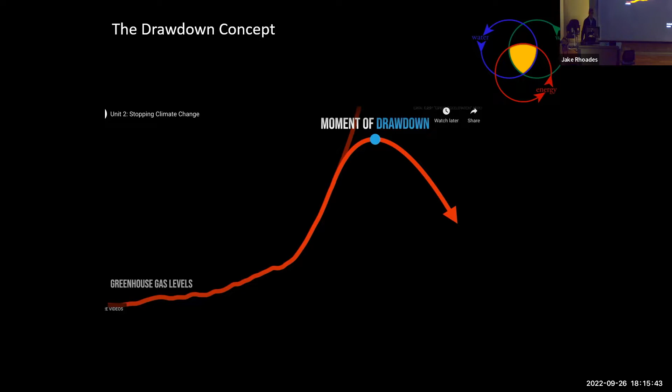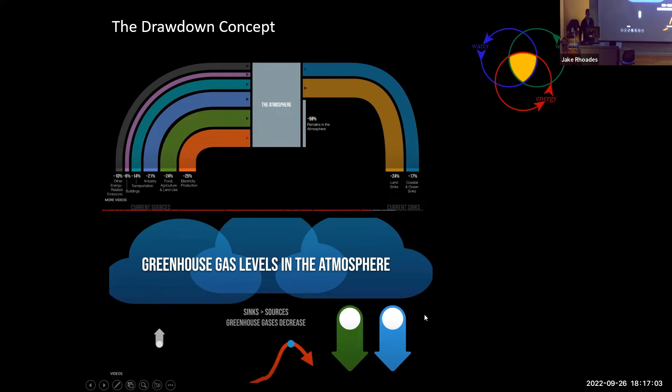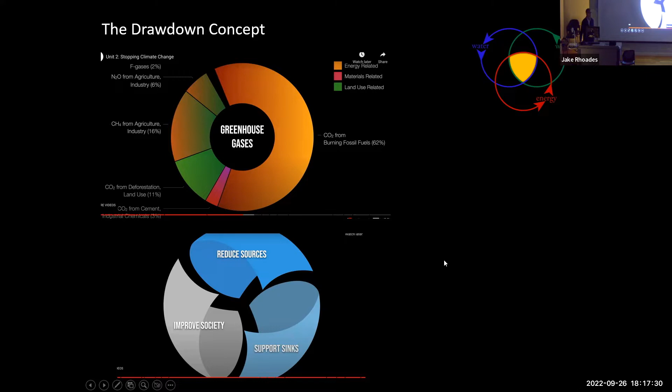And the consequences on extreme weather are going to be with us for 100 years. So we have to get to a model like this, where we have reduced all of these sources, improved the sinks—the ocean's capacity, forests, landscape, etc.—and in the process, improved the quality of our society. I think these can be done together. But this is the context within which we are designing our built environments.

And if you just look at the US, another way to simplify this is if you look at buildings and transportation—they represent about 60% of CO2 emissions, whereas industry and agriculture represent pretty much the rest.

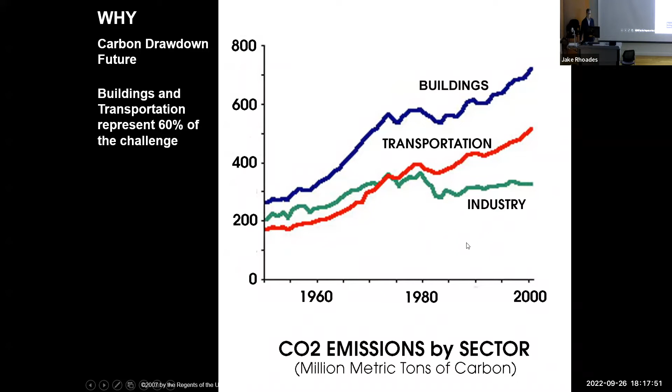So there are three important ideas I want to talk about, and I mentioned them at the beginning. One is to think of the buildings, your landscapes, transportation, energy, communication, water, waste, food, and the microclimate all as one design problem. You're not just doing buildings, you're not just doing landscapes, or designing transportation systems—these need to be thought of together. And if you do, there are all kinds of really interesting benefits across systems, a kind of synergy.

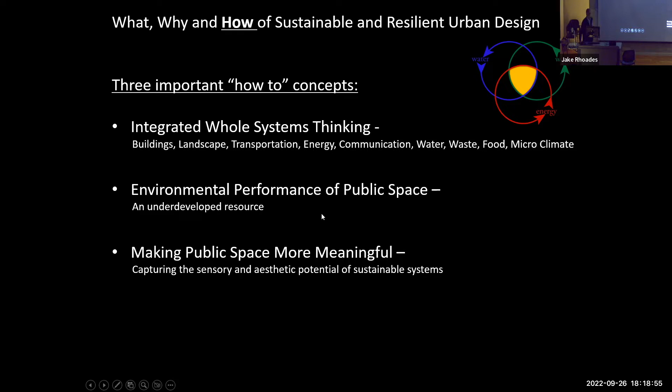The other thing is, as you'll see in a minute, the environmental performance of public space in cities is a huge amount of area, and it's underdeveloped in terms of its capacity to contribute to a more resilient and sustainable future. It also has the ability to make public space way more meaningful.

So why am I interested in environmental design at a community scale? Very simple, buildings are critical. I've worked on them for all my career in trying to make them better environmental performing buildings. And large utilities, they're critical, but they're too big and vulnerable.

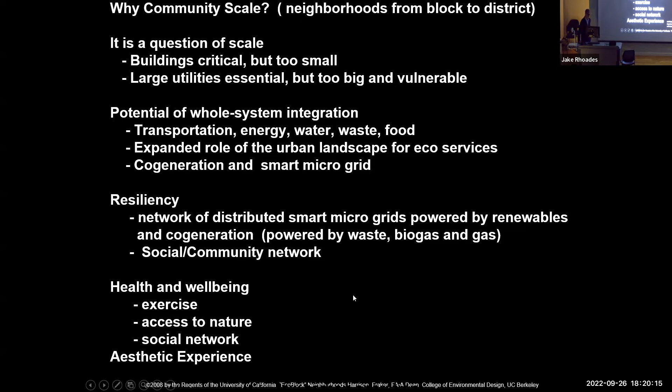You can do the whole systems integration best at a neighborhood scale, because you can work on the transportation, the energy, the water, the waste, the food. You can expand the role of the urban landscape or urban public space, and you can even do cogeneration and smart microgrids. This has a huge impact on the ability for neighborhoods to be more resilient and smart. And in the process, you have to have social organizations that support these systems, which is really critical in terms of resiliency, because it's the social systems and connections that are important as the technology, and the impact on health and well-being is huge, including the aesthetic experience as part of the impact on health.

So how did I come up with this idea of an eco-block?

One is we did these projects in China where we were shown these amazing super blocks where you have these gated communities where you come through a gate, you go into these places. There are 5,000 to 10,000 units of housing. They were building these at a rapid rate. Actually, many of them are just empty now because it was a whole investment strategy.

In some ways, they're very interesting because they are a kind of gated community. And what is the Forbidden City? It's a gated community. What is a Hutong? It's a gated community. So there's a kind of acceptance of the idea that you want to belong to a place that is yours and private and gated, but the impact on the city is huge.

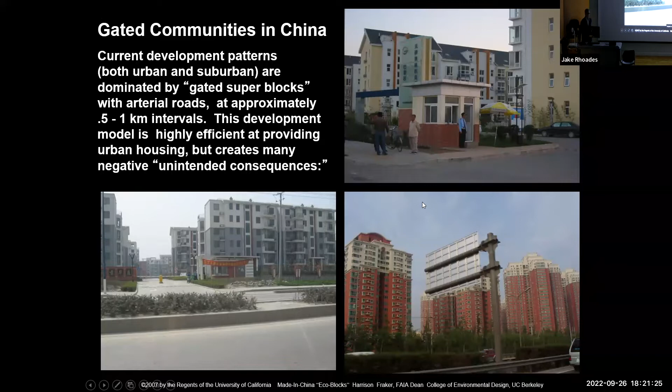This is what they look like. 10,000 units of housing on a city block, which is approximately a quarter of a mile square.

So we asked the question, could we design something different than a super block, which required a huge amount of energy, produced incredible dependence on the car, got rid of walking and biking, and depended on being able to dispose of a huge amount of waste.

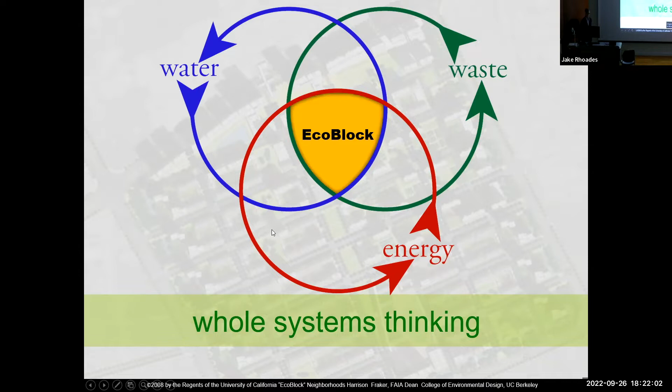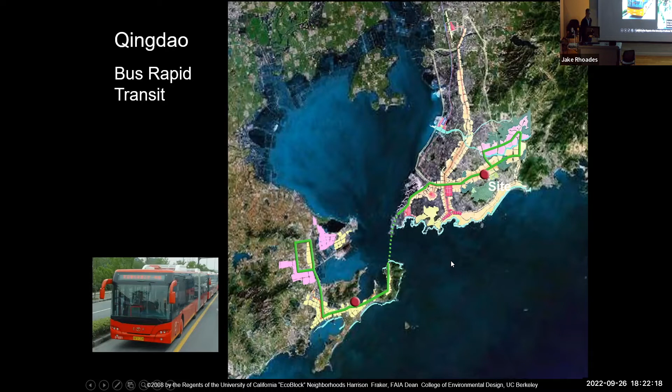So we got some money to look at this. We did a project first, which showed that these neighborhoods really did have a huge potential for being resource self-sufficient. And we designed a neighborhood in, remember the sketch that I showed you before with all those tall buildings, those blocks? We took three quarters of it and made it into streets, small walk-up blocks with towers in a park along the edge. We provided a public transit system that was walkable from the neighborhood.

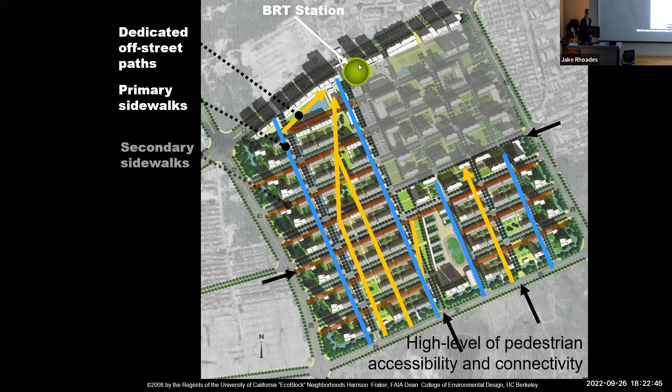And then this was the key diagram. First of all, you take the buildings and you make them incredibly energy efficient. You'll see how in a minute, really good envelopes, good windows, low air infiltration, good daylighting, etc. And then you have lowered the demand on energy to be able to be provided by wind and solar on the buildings.

But what was a critical discovery was we could use the food waste, the sludge from settling tanks, and the green waste from the gardens, and move them to an anaerobic digester to make biogas that could create electricity. So we were filling the gap with waste.

And in the meantime, we could take the effluent from the septic, treat it in living machines, and then put it back for the gardens or toilets, or you could even do some advanced ultraviolet disinfection and have it for drinking water. This was in 2005 when we discovered that you could do this. And we were really excited about it.

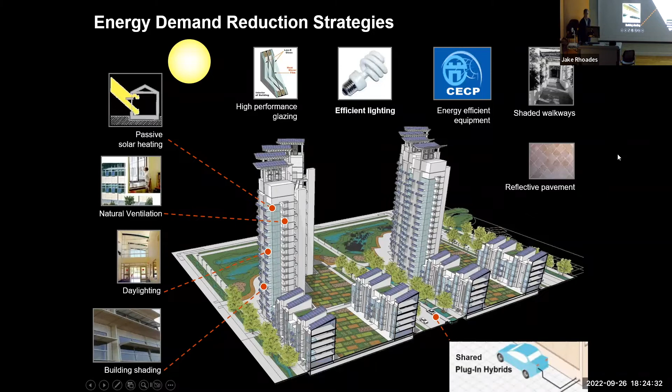So you can see really good building design, natural ventilation, passive solar, daylighting, really good envelopes, efficient lighting, efficient appliances, shading the public space, changing the paving, etc. And then providing the energy source from these three sources: solar, wind, and biogas.

I'm hoping the next one shows this. Yes.

No silver bullet. You have to do all these things. But the key thing is if you do what could be described as conservation and efficiency, you can reduce the load 60%. And now with some of the passive house standards, you can actually reduce it way more than that, which means the photovoltaics, the wind, and the gas has a much simpler job and can be much more manageable in size. When we did these initially, we only had the digester doing a little bit, but it can do actually a lot more, as we learned.

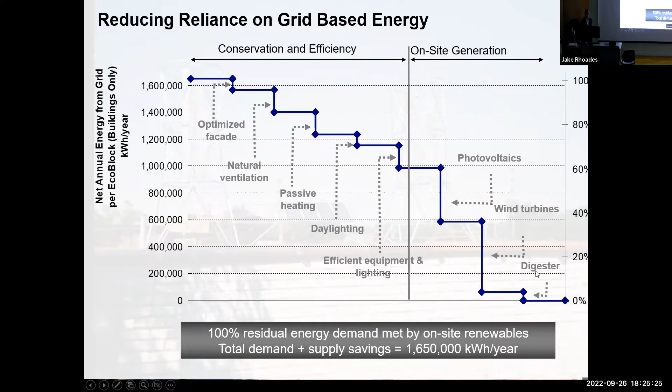The digester technology is really advanced. It's a two-phase process, so it's much more efficient. So you get a lot of good methane, you get water, and you get fertilizer out of the process.

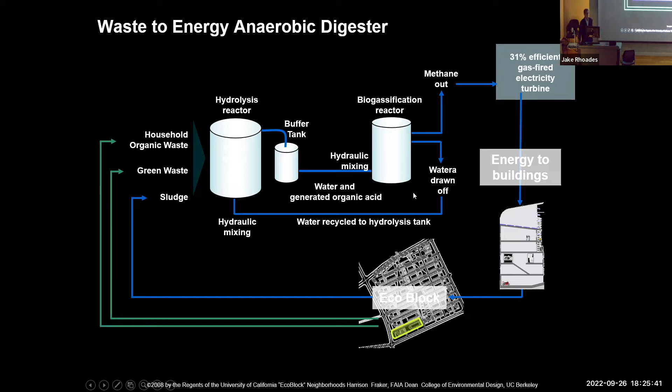It's incredible. Here's the diagram: primary treatment, liquids and solids. And you can see on the bottom, you get hydrogen, methane, and compost. So in effect, what you're doing is you're taking the energy out of what traditionally would be compost.

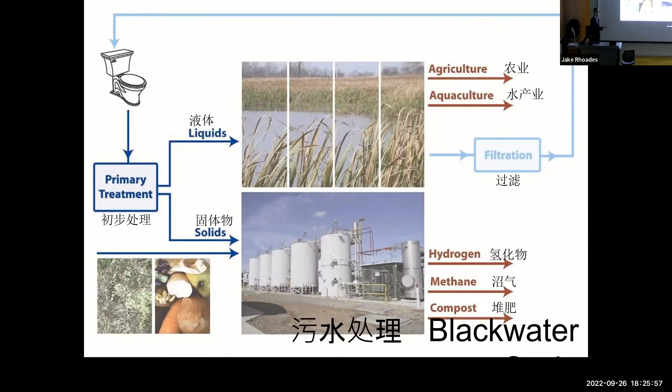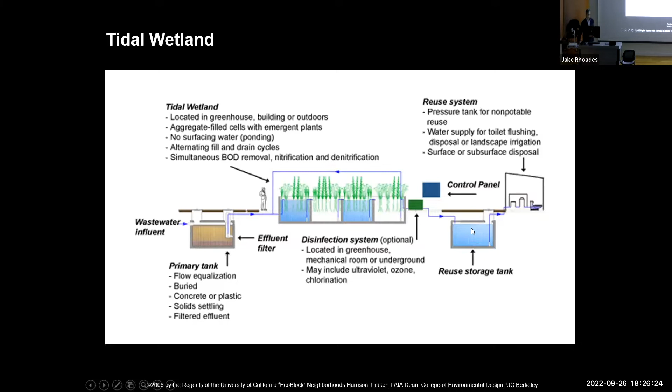You can also run water through a living machine, where you cycle it through an aerobic and an anaerobic set of tanks. The water goes in, sits for a while, is eaten up by some bacteria, then goes into a dry place where it's eaten up by other bacteria. You cycle it, collect the water, measure the quality, and use it for the right purpose.

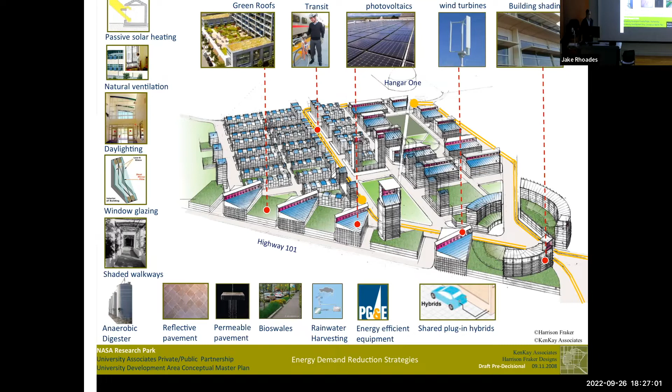We did a whole bunch of projects trying to show this. This was going to be a project down on the peninsula for a piece of land that was going to be a whole research center, hotel, and housing. We used all of our knowledge from passive solar, daylighting, wind and energy conservation, and did these step-downs to show how laboratories, low-rise housing on podiums, high-rise housing, and even large laboratories could be zero carbon.

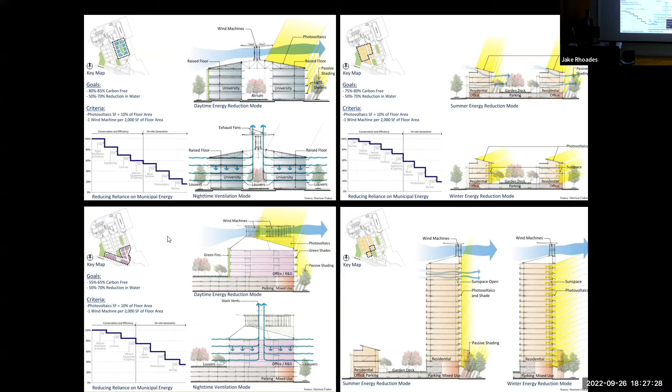Hearing some talking. Is that me?

So when you're an academic and your big idea is not able to get built, what do you do? You go on sabbatical, you visit all the early versions of this, and then you write a book about it.

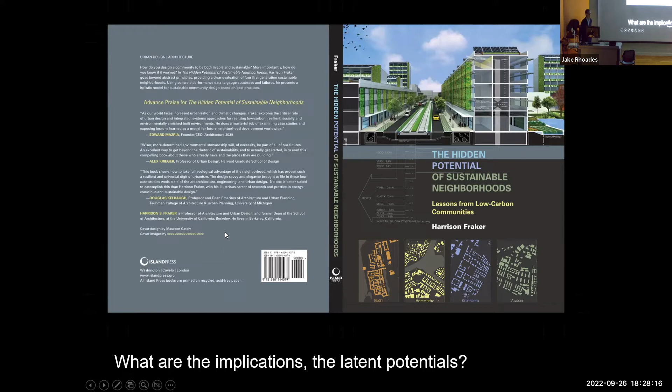I'm going to go through these pretty quickly because you can look them up. It was really fun to do this. I went to about a dozen to fifteen different neighborhoods and then chose four because they really represented what I thought were the best examples of how you could do integrated whole-systems thinking. It was fairly descriptive at first and analytical, and then I tried to draw lessons learned. I looked at the development process, transportation, the urban form, the green space, energy, water, waste, the social agenda, and resilience.

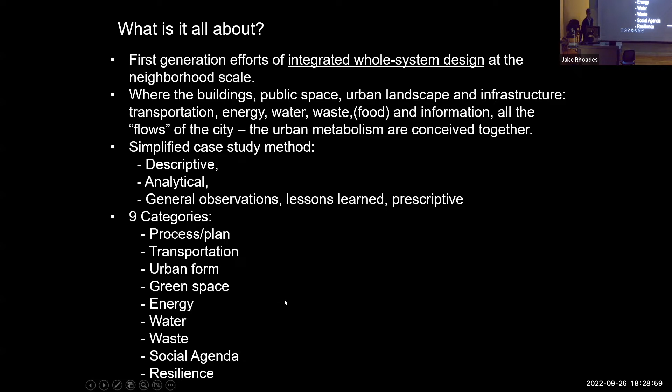There are four projects, two in Sweden. One is in Malmo—this is Malmo here, Bo01, right on the coast. And this is Hammarby in Stockholm. Then two in Germany: one is Vauban in Freiburg, and the other one is Kronsberg, which is right outside of Hanover.

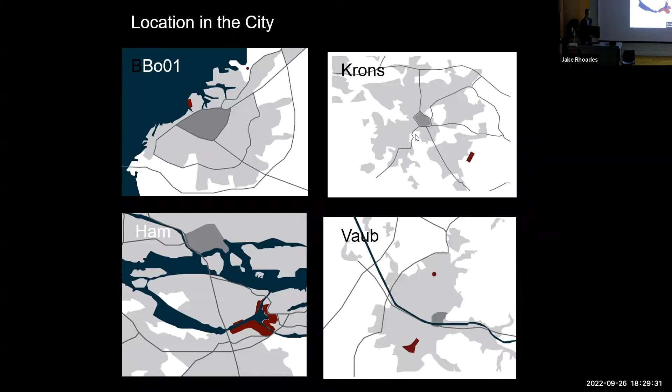Why won't it go? Oh, okay.

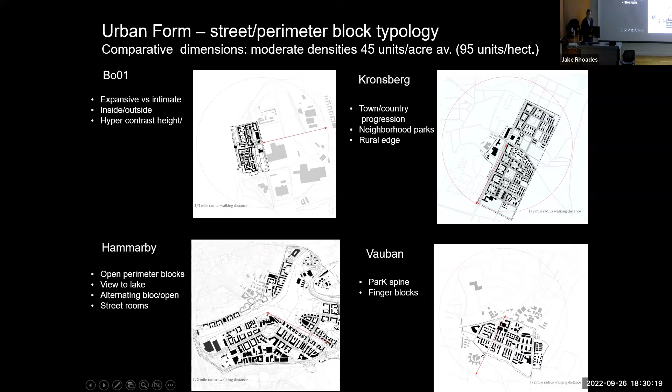We could go through this a lot if you're interested in the urban design. All of the projects really use a perimeter block concept, but each one is slightly different. Bo01 has this amazing view to the Öresund, and then these blocks with wonderfully rich, almost medieval internal spaces. Hammarby has perimeter blocks that open up for views. Kronsberg has perimeter blocks that get smaller and smaller in scale all the way to the landscape. And Freiburg produces blocks with fingers that allow you to look into the blocks, which are really interesting.

Transportation is perfect—it's the standard in Europe. You only have to walk 300 meters to get to a stop. It's sheltered, and the headways are short—you wait maybe 8 minutes at most. It's really connected to where you want to go. You have a wonderful pedestrian environment, great streets, dedicated bikeways, limited parking, and of course it's subsidized, so it's very affordable. We should have free public transportation in this country.

The planning was really interesting. Bo01 was supposed to be a housing expo, but designed by a single master planner. Hammarby was designed by the planning department in Stockholm. Kronsberg was a competition for the plan. And Vauban was really interesting because it was done by a series of local Baugruppen, cooperatives that bought the land, did the design work, and actually hired the builders—they were their own contractors—and it performed amazingly.

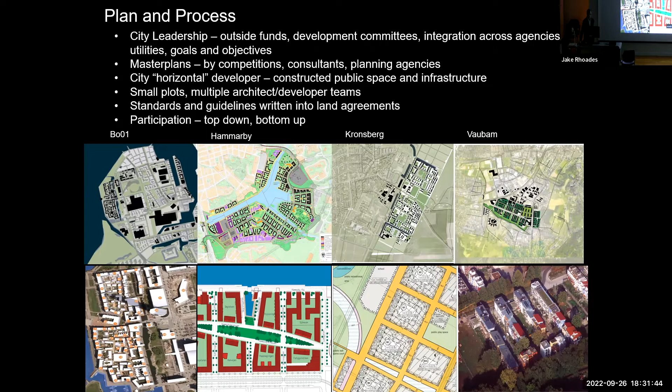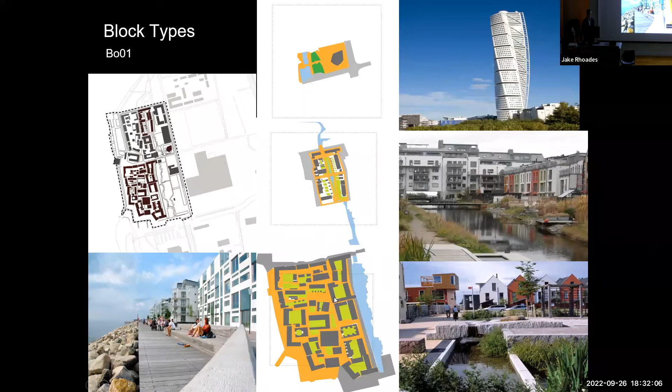We could go through all the blocks—they're really interesting. What I loved about this project is it's basically all low-rise, high density with one tower. So you get the advantages of both: high density from the tower, but there's only one, so it doesn't block all the views. In these places, you're hardly aware of the tower.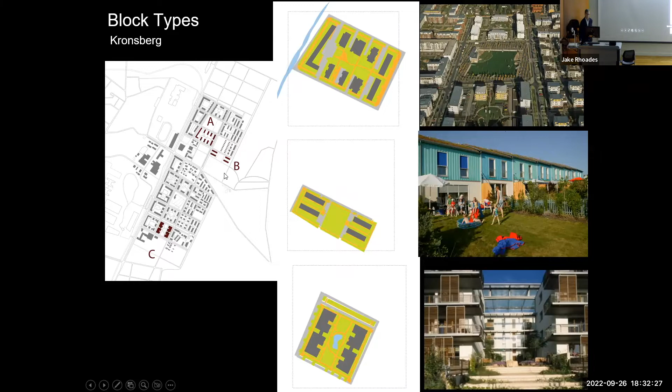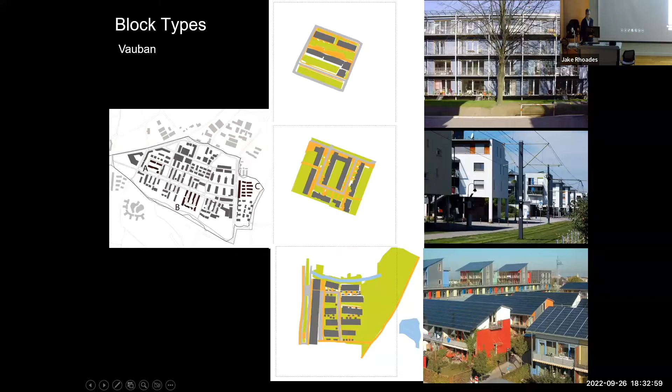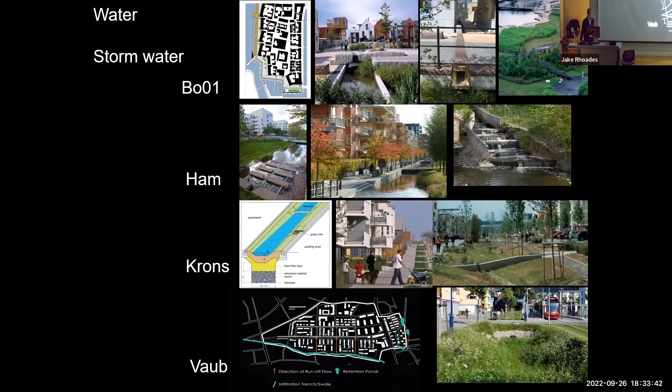The most important thing that I learned from all of this, which is actually why I wrote the second book, is about the public space. This urbanism is very different than a lot of cities. The green space that's integrated into the higher density is what stands out. They treat the water, they create incredible parks, and suddenly the environment now is performing in a way that in most cities this stuff is just put underground and gotten rid of. So the big takeaway was a different notion of how we make urban public space.

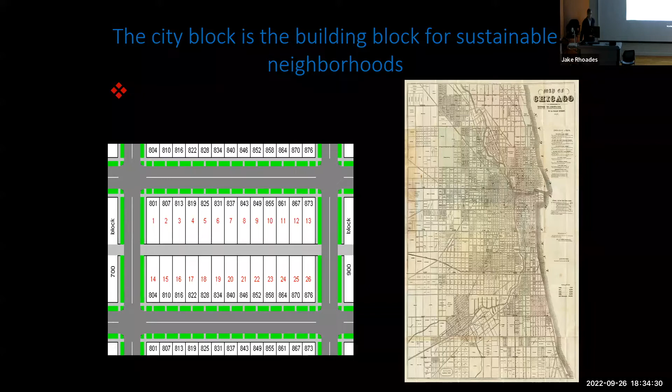So after that, when I came back, I said, well, why don't we try to do this right in our backyard in Oakland? You know that most cities in this country were built before the Second World War in close-in neighborhoods like this. We got a lot of funding, a lot of help. 40% of the housing stock in California, believe it or not, is not in the suburbs. It's in these close-in neighborhoods.

And if we're going to get to carbon neutral, we have to find a way to retrofit these. So the challenge was, could we do this? Could we make these neighborhoods more zero carbon? Could we actually help the microclimate given the heat waves? Could they get to zero carbon? Could we charge EVs? Can this be rapidly deployed? And can they be funded by the savings in utility bills?

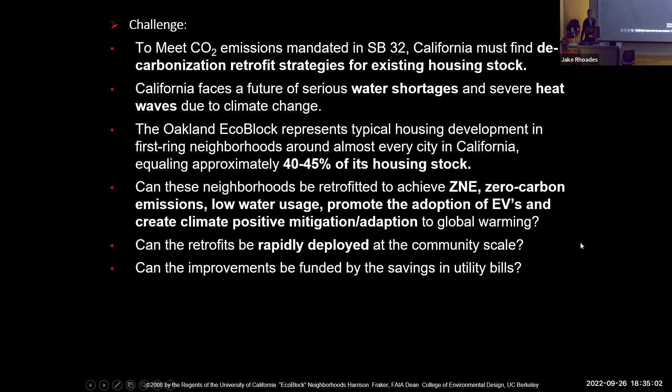So this was the idea: make a community solar on the roofs where you collect it with a DC system. You can store it, all DC. You can come back and do street lighting and charge cars. You go to one inverter. That inverter then can take the energy back to the houses or to the grid. Pretty simple idea as a microgrid.

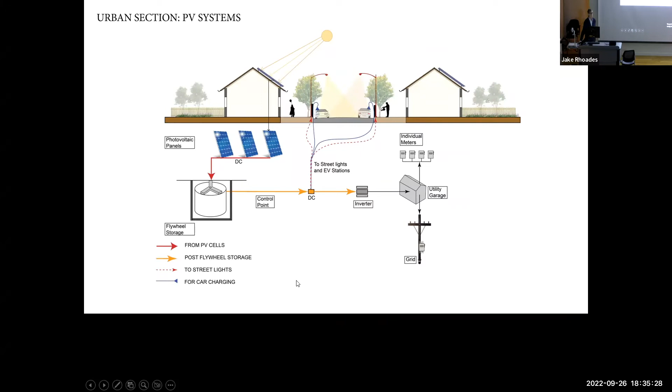You can also do a lot with the water. It's crazy in California that actually capturing rainwater makes sense for 2 months and actually using it. But you could also take water out of the sewer, mine the sewer. The biggest water resource in California is wastewater. It's completely dumped, and it is a huge volume. Why should we be throwing away and using drinking water for the purposes that we currently do it at and then throw it away? So we looked at the idea of taking water out of the sewer, treating it to remake the microclimate. In other words, changing the tree cover.

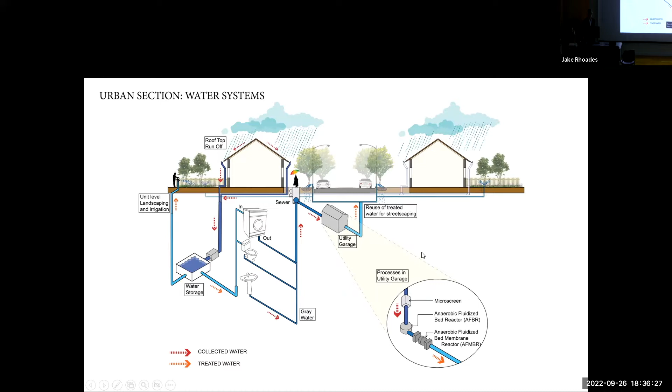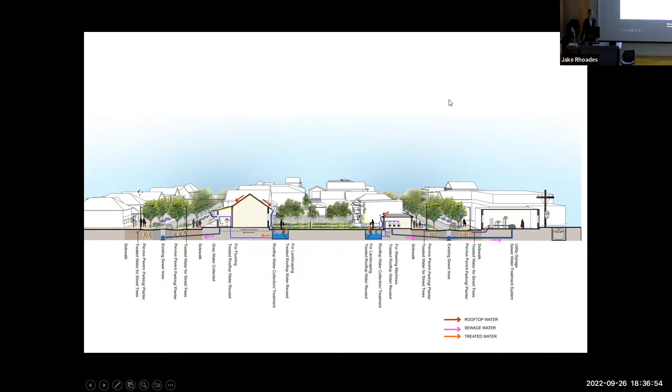And where is this important? The Central Valley, Southern California, where we are talking about a disaster in terms of the urban heat island effect and problems in urban neighborhoods. This is what it looks like. It's now about to start construction. It has been a nightmare to try to get this done. And the biggest problem has been the utility, who's fought us every step of the way. We actually think if we can prove to them that this is a good idea, they might actually adopt it and stop being people who are so opposed to this.

I won't go through all of these things, but it really does have a huge number of benefits. We're doing this from the savings of the utility bills. We're converting to a completely renewable energy source. We're charging EVs, and actually the money saved in running EVs, electric vehicles, from PVs, is part of the economics. You can do about 40% of the vehicle miles traveled. Critical is shifting from gas to all electric so that you're not polluting the houses.

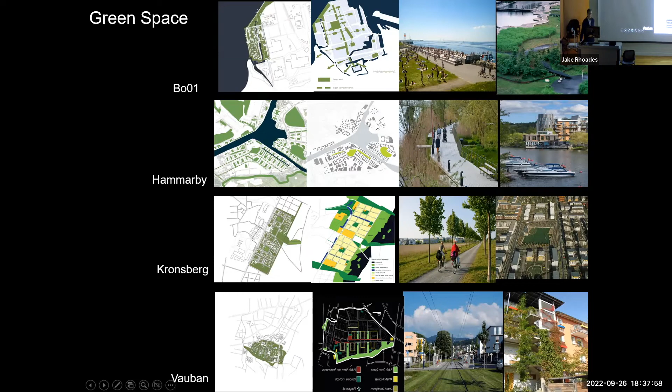What I love about this is the UN has recognized this and said public space is critical to achieve their sustainability goals. It has to do with health and well-being, equality, work, climate, and environmental performance.

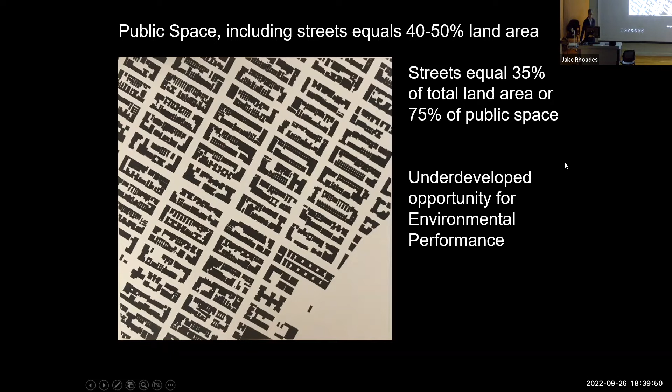So what about the public space of cities? It represents anywhere from 40 to 50% of the land area. And if you know, most streets—it's mainly streets, but some parks—are treated pretty generically.

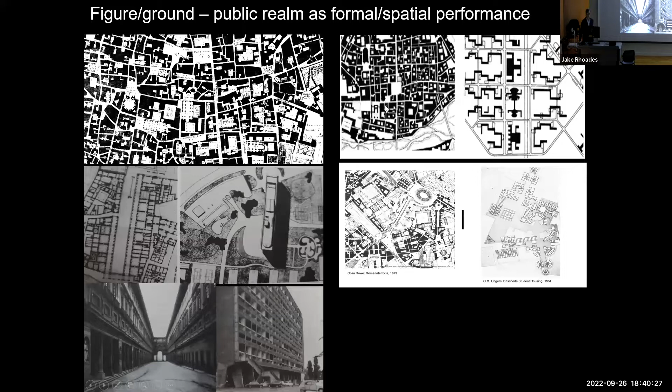Let's look at how we've looked at public space. There's a very formal compositional tradition where the public space of the city is a spatial formal exercise. You're really interested in the sequences, the type of spaces. You can see an older tradition where buildings make space, and some more contemporary modern traditions where buildings are objects in space. But it's really a spatial game.

Then you have a very alternate approach, which is to worry about the social performance first. This is Jan Gehl, where you're interested in what functions you're trying to support, and you provide the facilities that enhance and enable and afford that, and then the architecture frames it.

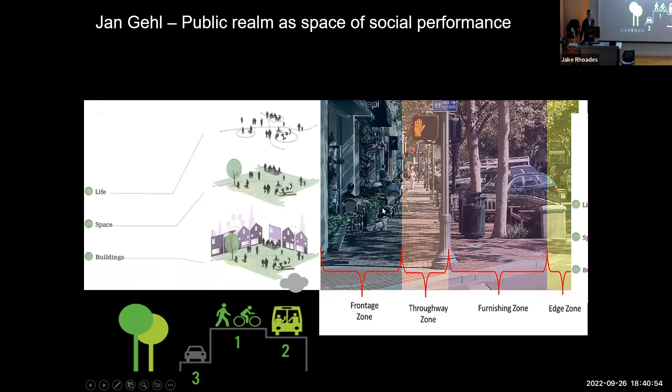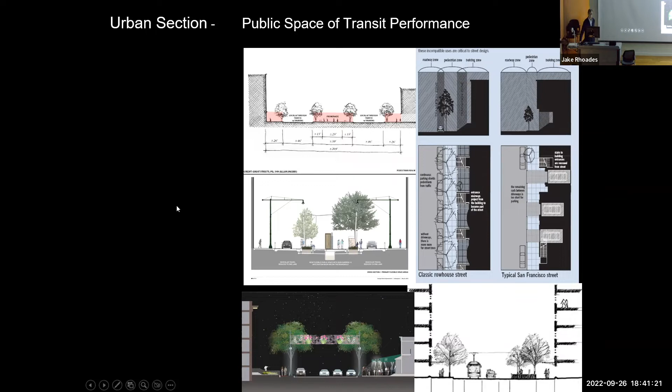There's been a whole tradition over the last 20, 25 years of livable streets, which is to transform our streets from just being primarily car-oriented to being a multimodal place for pedestrians, bikes, public transportation, as well as the car. It's a very rich tradition, but is only modestly being applied in the United States.

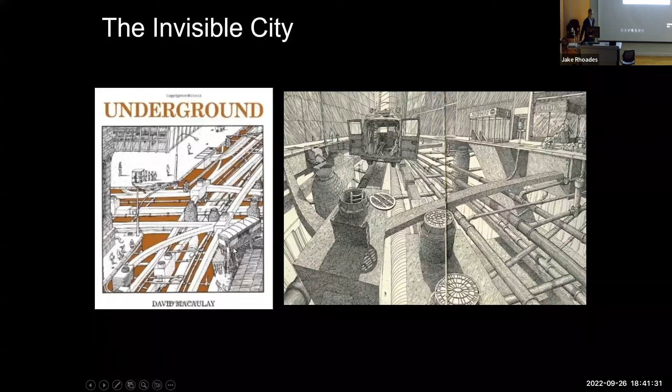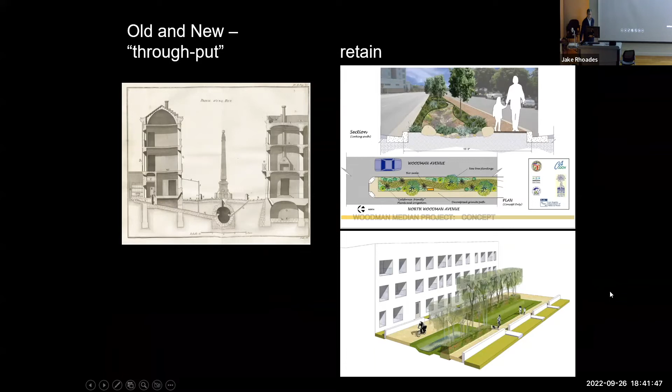And then there's, of course, this vision of what public space does. It basically gets rid of everything—underground, it hides everything. Here's the old throughput system: get it away as fast as you can, dump it in the sewer, and get rid of it. And here's this newer tradition where we use it for multi-functions.

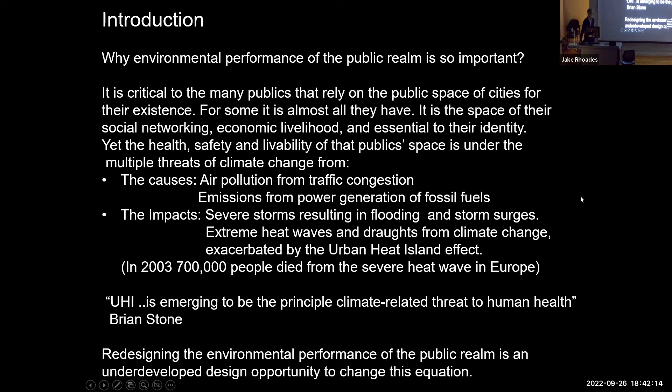So remember all these functions? Why is the environmental performance of public space so important? Because given global warming and the urban heat island effect, if we don't do anything, many of our cities will be uninhabitable for large portions of the year because of overheating. And in many cases, it's the only place that many publics exist. So this is really a vital social problem.

I won't go into the urban heat island effect, but most of you understand what happens. Cities absorb all the sunlight. It's absorbed in the materials of the city and re-radiated at night, so it never cools down. Buildings dump all their excess heat from air conditioning into the city, and cars and vehicles dump their heat into the city. So there is a huge heat buildup in the city, where they can be as much as 14 to 16 degrees hotter than the outlying countryside.

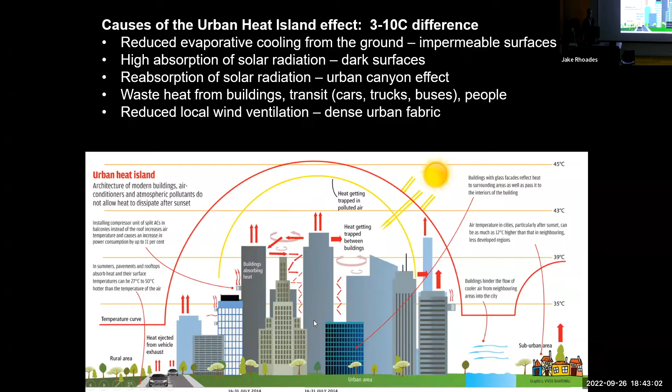So, you know, I'm a passive solar pioneer. I really believe in the building envelope as an environmental filter, where you try to get the good stuff in and keep the bad stuff out. The problem now is you don't want to dump the bad stuff into public space. So the design of building envelopes now is much more of a two-way challenge. You want to provide comfort on the inside of the building, but you also want to pay attention to the comfort in the public space.

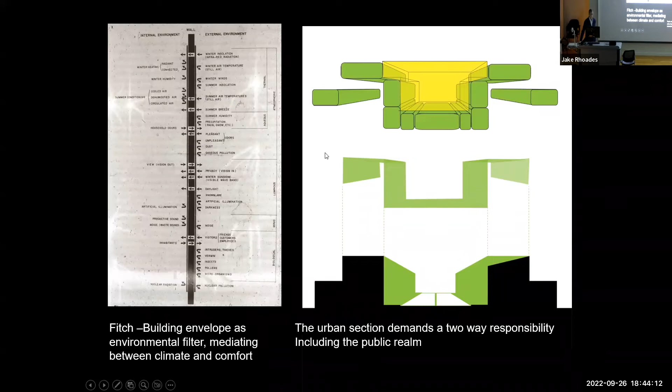It really means re-examining every single surface of the city—the walls, the floors, the sidewalks, the roofs, the gardens. It really is the place where this operates. That's why, when I was in studios today with Benjamin and other faculty, I find this section one of the most loaded and interesting ways to understand how buildings can be more responsible to the public space of cities.

So one of the things we did is look at all the surfaces, look at urban floors, look at all the functions that clean stormwater, retain stormwater, charge groundwater, temper climate, absorb carbon, improve air quality, create habitat, and so on. What a benefit. And it has all these dollar improvements—saves costs on water, energy, carbon costs. It's good in terms of health, community value, and it enhances the senses. Look at these floors.

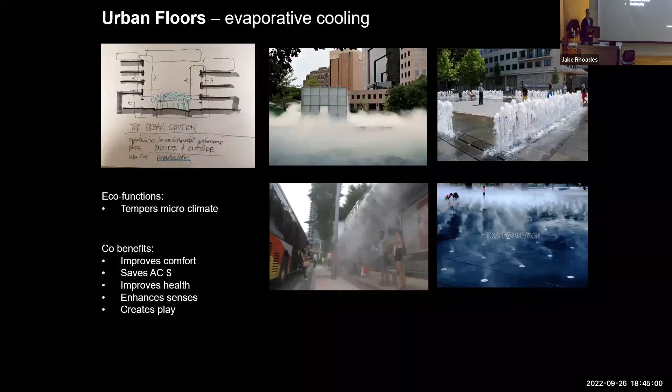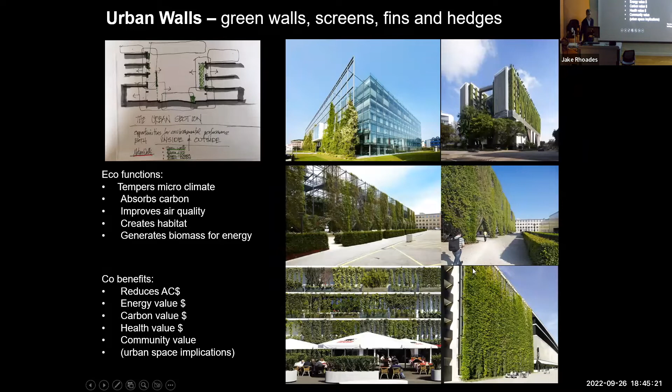Evaporative cooling improves comfort and tempers the microclimate. Look at the walls—you can put a new screen up, make a new urban space in front of it, create a shaded area behind it. You can shade facades, even make whole buildings out of green in the city, with all the same eco-functions and co-benefits.

Just some more examples. I love this one because it's a very lightweight steel structure, but the living plants are what turn it into a building—though you could have this be an object. All of this could be put around the city to make entirely new green rooms.

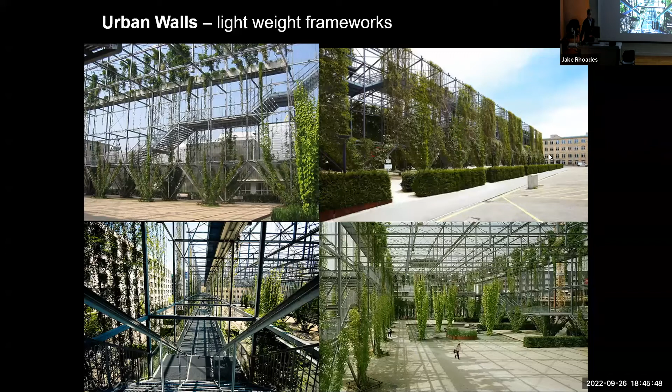What about canopies? They're spectacular. Trees are amazing—probably the best investment cities can make, even though you have to maintain them. The traffic engineers don't like them, but they are incredible in terms of the qualities they add to urban neighborhoods.

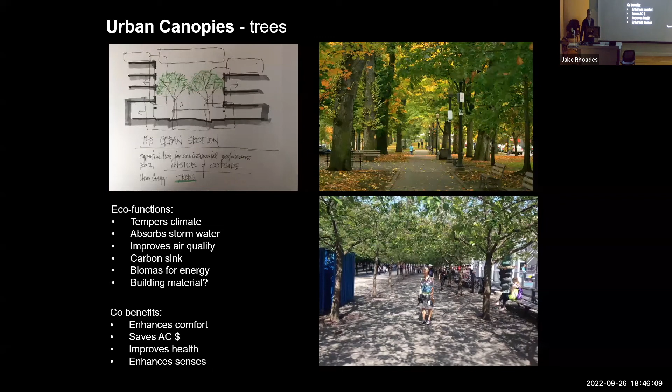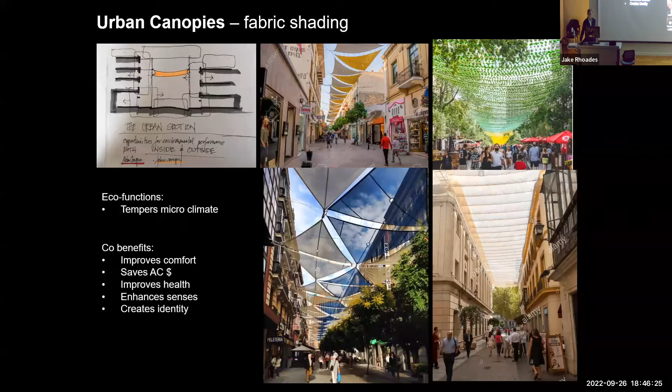You don't have to just do trees. You can do all sorts of fabrics and canopies, and make them dynamic—pull them shut during the day, open them at night for night sky cooling. They make wonderful spaces; you can see just some examples.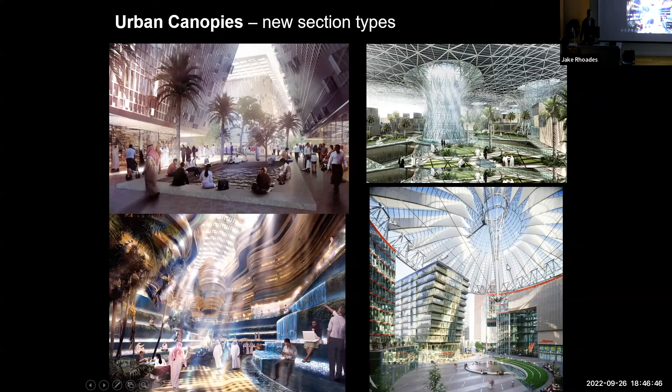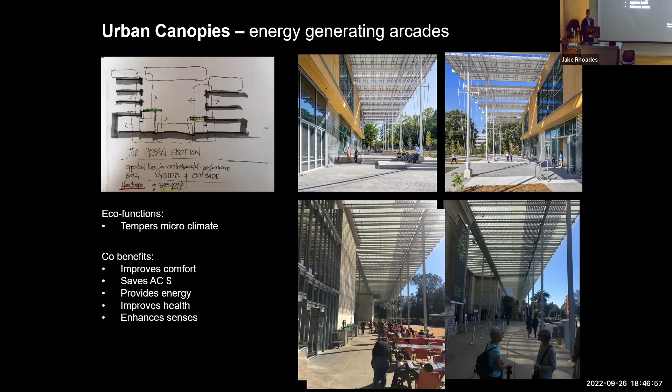The canopies can generate energy, making a huge difference—they provide shade but also provide energy. They can be of all sorts of materials, and they can even be green.

You can also go be on top of them—have a parasol and be underneath it. You can paint the ceiling or roofs white to reflect solar energy. This is on top of the Oslo Opera House, a wonderful place.

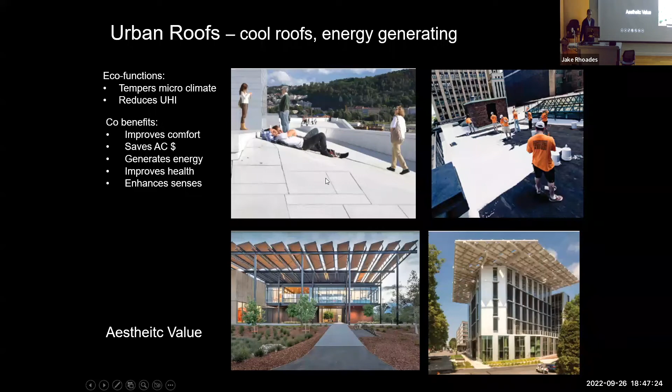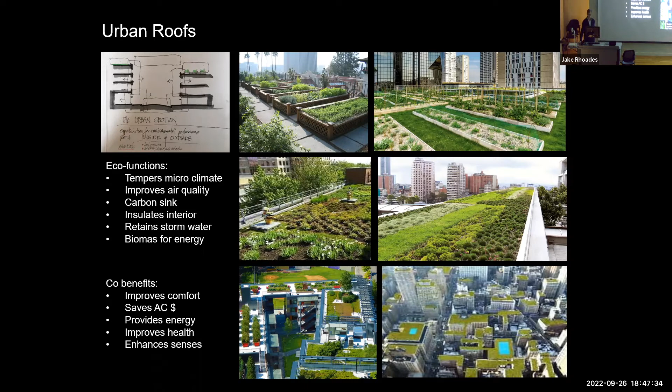You can do all sorts of other things: grow food, have gardens. You can even make whole new neighborhoods with bridges between the roofs.

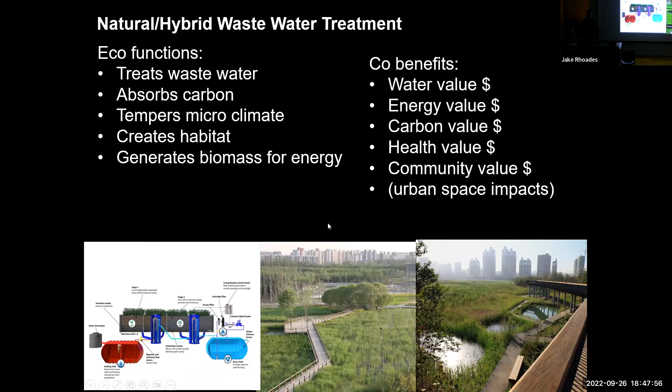You can also use the parks—they can be sewage treatment plants. These are two parks in China, in Tianjin, that are actually treating all the stormwater and wastewater of the housing in the distance.

So again, the urban section is absolutely critical. I put this up to review the point that the floor is a whole design opportunity. The walls are not just for the building—they can belong to the city. The canopies, the same thing, and same with the roofs. They're a huge undeveloped opportunity.

In appreciating this, I realized one of the problems with sustainable public space is that the aesthetic and sensorial have not really been part of the discussion or the design challenge. Yet neuroscience has been reminding us how important embodiment theory and the senses are in constructing meaning in our lives. So I wanted to look at the environmental performance of public space to see if these insights from neuroscience were operative, and whether we could remind the urban design fields how important that was.

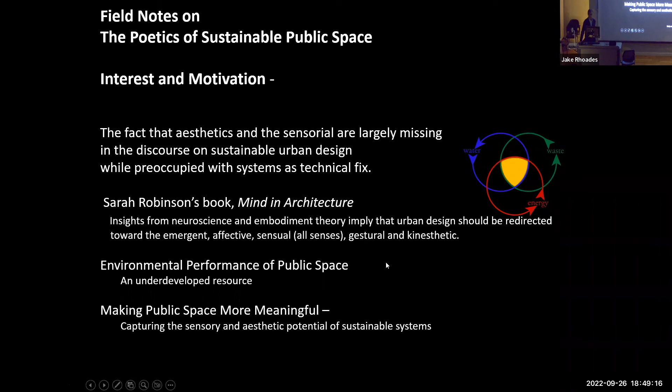Here's some of the insights. First, the desire for meaning is not just an elitist urge—it's as primal and fundamental in almost every culture in the world. In some cases it's practically on the level of food, because people may have very little in their lives, but if there is a meaningful place they can exist in the public world, it's as important as it can get—it gives them meaning and hope.

The other key thing is mirror neurons—an incredible discovery made possible through brain scans and imagery. When we see a cup, it's not just visual; it activates neurons in our motor and premotor cortical areas, as if we actually picked up the cup, held it, drank from it, felt its warmth, smelled the coffee. So perception is much more dynamic, sensorial, and almost precognitive.

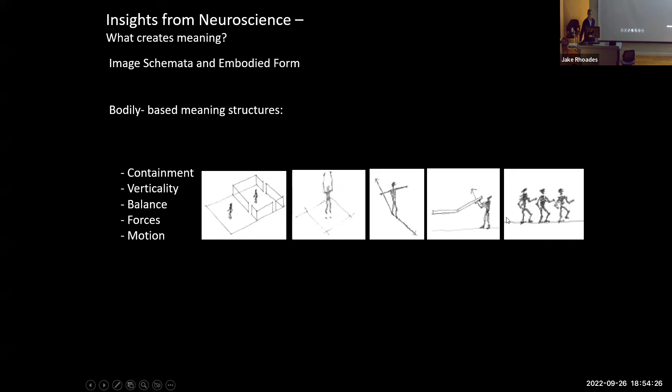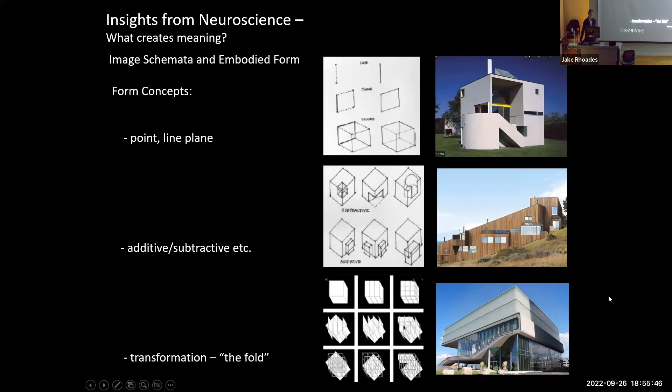So we said, let's go take a look at some public spaces and see if we can see these insights from neuroscience as being more operative than we realized.

So I bet a lot of you have been to Paley Park in New York. It's this amazing little vest pocket park. First of all, it reduces the temperature in New York City in the summertime by 10 to 12 degrees. This is measured.

And look at what it does. It does much more than a technical solution. We simulate the gestural ideas of first a forecourt, you can see the gesture here, and then the enclosure of the room behind. It's made up of wonderful walls.

We can occupy it in multiple different ways. It affords many ways of being in the space. It has incredible environmental performance: shade, evaporative cooling, evapotranspiration from the trees and the ivy on the walls, huge sensory engagement, the sound of the waterfall, the touch of the materials, the feel on the skin, the dappled light.

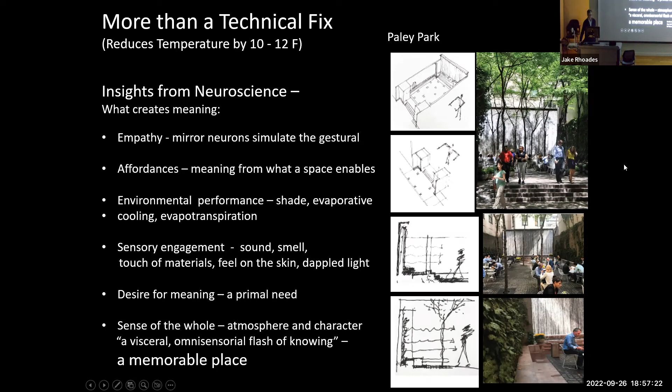So this is a pretty profound space, and yet it's kind of everyday, but it has snuck into our imaginations and stayed there for these deep reasons. So we have this visceral knowing of this place that's extraordinary.

So that's New York. This is Venice, Scarpa's little courtyard off the side of the Biennale galleries. I don't know if any of you have been there, but it is the most soothing and restoring sensory experience I've ever had.

Because you've been in these galleries, you've seen all of this art, your brain is saturated, and you walk through a door and suddenly there's the sky, green enclosure, and shade. And then there are a whole bunch of other things: there's sound, smell, light. It's amazing. So it's a hugely powerful place.

It does have this little shading device that has round cutouts.

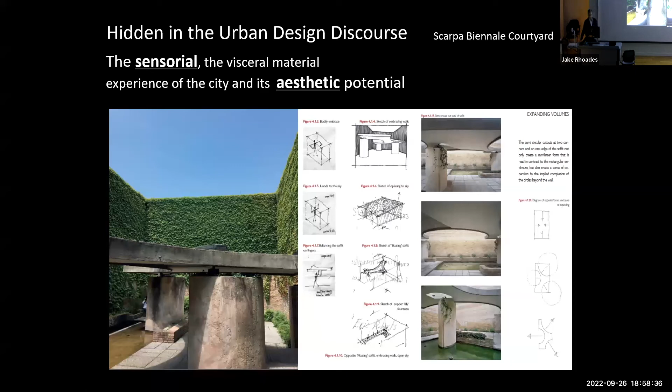It's in contrast to the very rigid room you go into. You can see they're cut out in the corners, so it seems to expand the space. It's a really brilliant place. Scarpa was really good. Here's one of the wonderful things.

When you go in there, it is really cool. You can find shady places to sit, and all sorts of different ways to occupy the place. But there are fountains. You see this little water fountain here? This is a copper lily. The water hits this and makes music.

What happens is the ringlets around this get reflected on the soffit of the shading device. So you have a visual echo of the sound of the lily, and the smell of this water. Suddenly this is a place of amazing sensory delight.

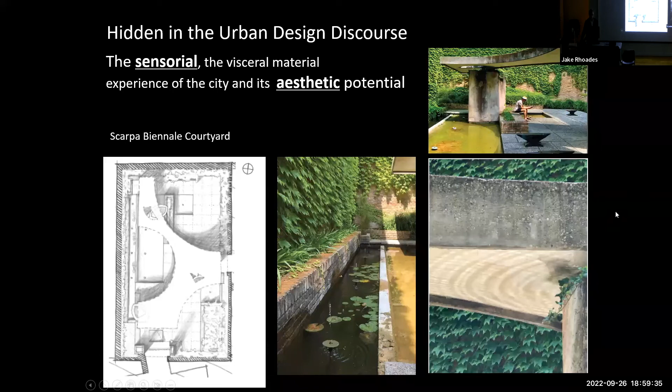So one of the things we did for the book is we said, well, let's take some pretty iconic places and let's really try to blow some people's minds and redesign them.

So you all know where this is in Barcelona? This is the Placa Reial. It's a Renaissance square that was put into medieval fabric, and you come off of the Ramblas and you come into this courtyard.

It is unlivable until 11 or 12 o'clock at night because it's so hot, and it's going to be even worse given the heating issues with global warming. The reason is because it's not shaded enough on the floor, so it absorbs heat, and all the facades are masonry and get heated up by the sun. So even at 9 o'clock, it's still almost 100 degrees in this space.

So we said, well, what could you do? Suppose you shaded all the facades with an energy-generating canopy, and you had green fins that kept the low sun from hitting the facades. And let's say you put the fruit orchard in one end, which was there originally, and you put canopies on the south end.

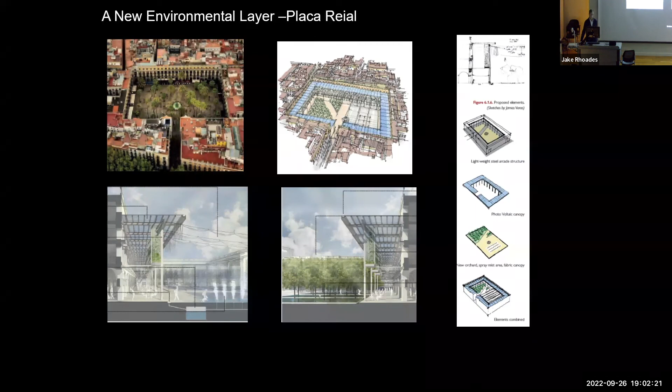So that was just to try to suggest that we could make some real changes. So then we also said, let's go to Harlem.

Harlem, a disinvested neighborhood, has practically no tree cover. Let's take the streets that are symmetrical, put all the parking on one side, get three rows of trees down the middle, and increase the shading by 70%, changing the temperature. You can see the kind of activity that you have. You're absorbing the water in these parking spaces, and you've completely transformed this place.

And then you take the avenues with practically no trees on them, and you do a canopy that's closed during the day and open at night, so you get the night sky. And you turn 50 blocks of Harlem into an oasis.

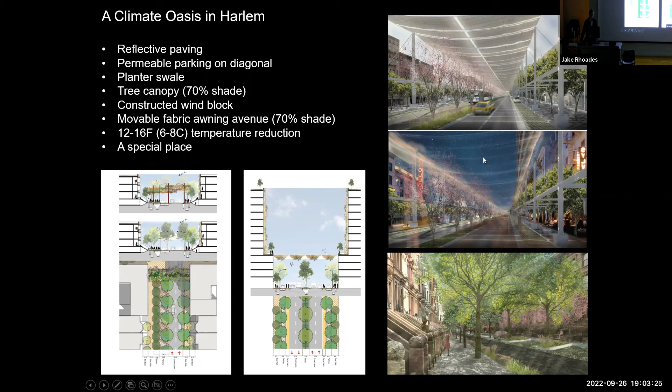Just another example - you could also take the cross streets that are really wide in New York. There are five or six of them. You could make a hanging garden that's an energy generator, an 18 megawatt power plant, so you could run all of the street lights in Lower Manhattan from this thing.

And you could make a hanging garden and completely transform the experience of going from one river to the other. It's just to show that some of these sustainability ideas can be more than just a technical solution.

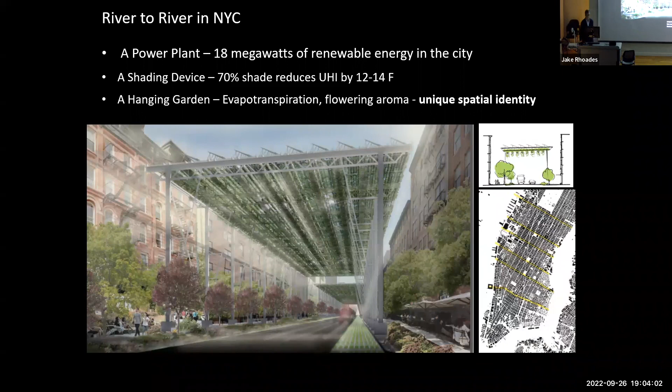So that's what we tried to do in this book. I urge you to get it. It's really fun - you'll see eight case studies.

The key thing about this is an invitation for all of the architects, landscape architects, and city planners to go back to public spaces that are part of their visual imagination, and try to understand what has made them that way, to expand the number of examples, so that when you go to design the public space of cities, you take these into account - because this is what's going to make our cities livable. So thank you.